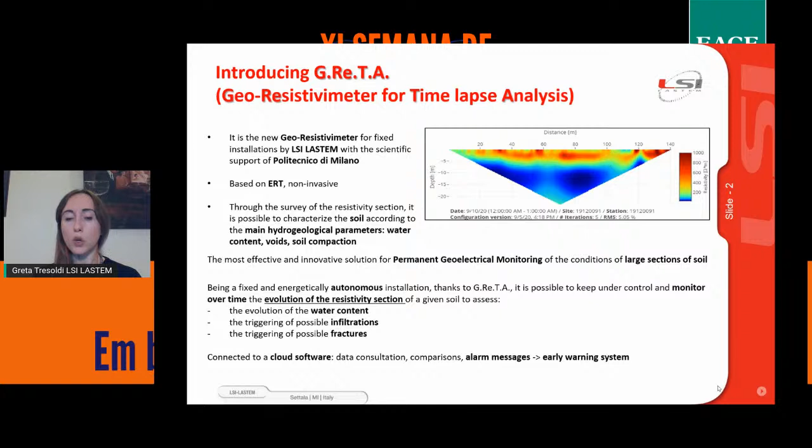As I said, the system is always connected to a cloud software, and it is possible to consult the data, but also to program the system and set thresholds in order to transform this system into an early warning system. Here is a short video to understand the technology better, and then we can go through technical specifications and also case studies.

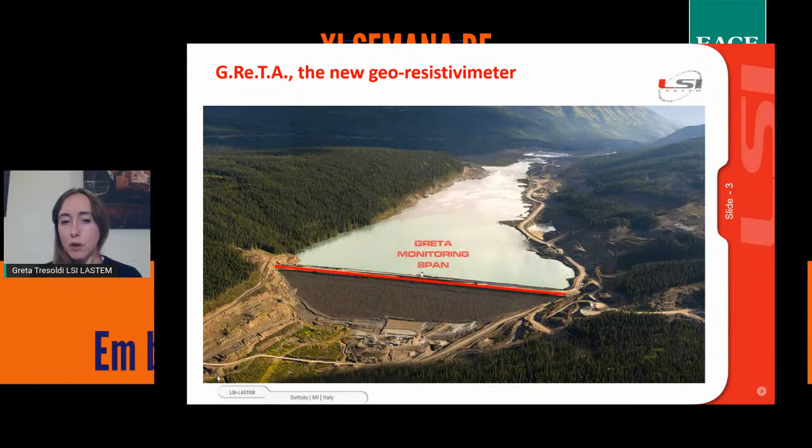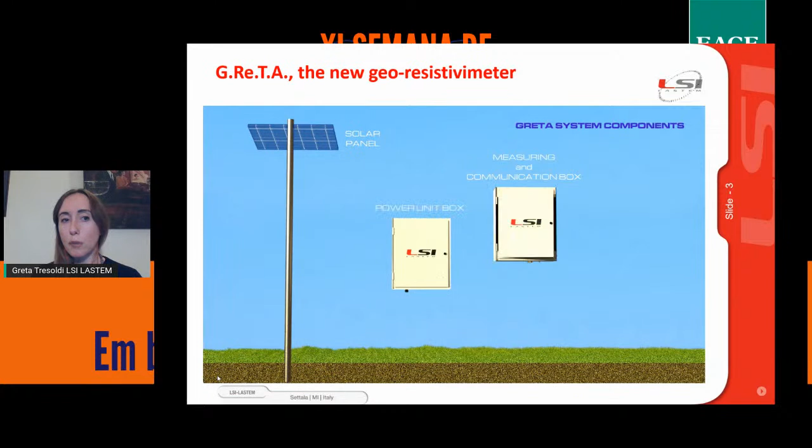So this is the acronym of the system. Here is an example of how the system can be used, for example, for an earthen dam, put on the crest in order to monitor the subsoil. Here the system has a box where the different modules for the measurements are contained, and the system can be connected to a solar panel or the main grid. There are different parts: power unit, communication unit, measure unit. The system is accompanied by two cables with a total of 48 electrodes in order to perform the geoelectrical measurements.

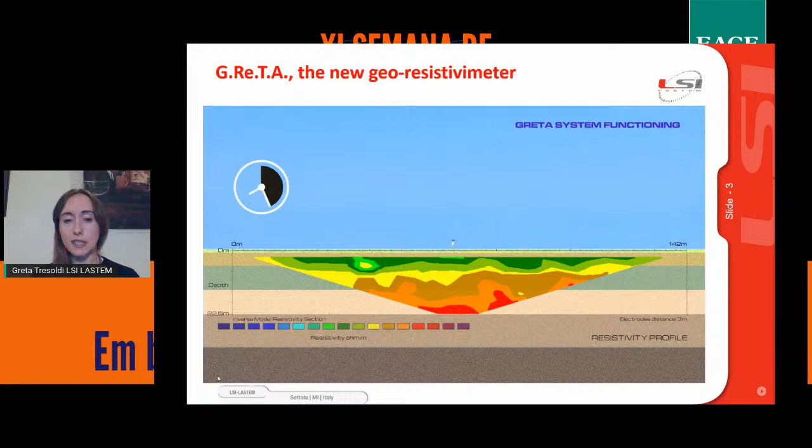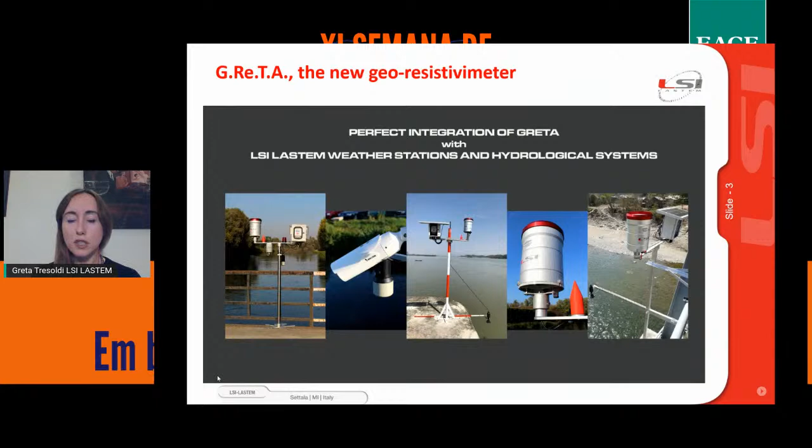So to insert the current and measure the voltage, the inversion is done directly on the cloud software. If something is changing, the cloud can send an alarm message. The system can also be easily integrated with different kinds of sensors, such as meteorological or hydrological sensors.

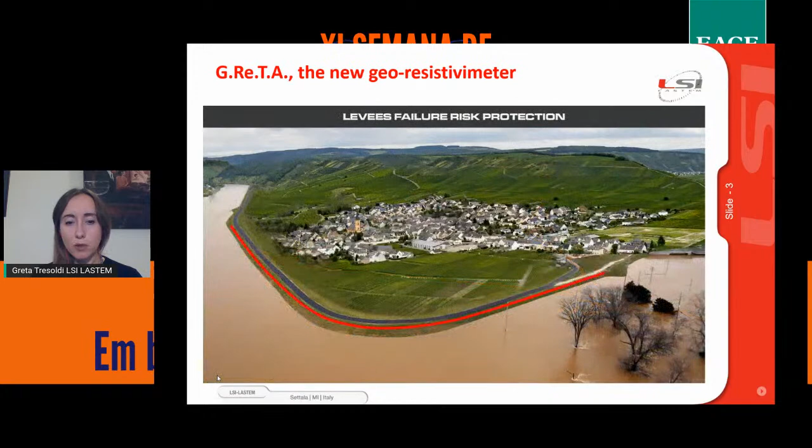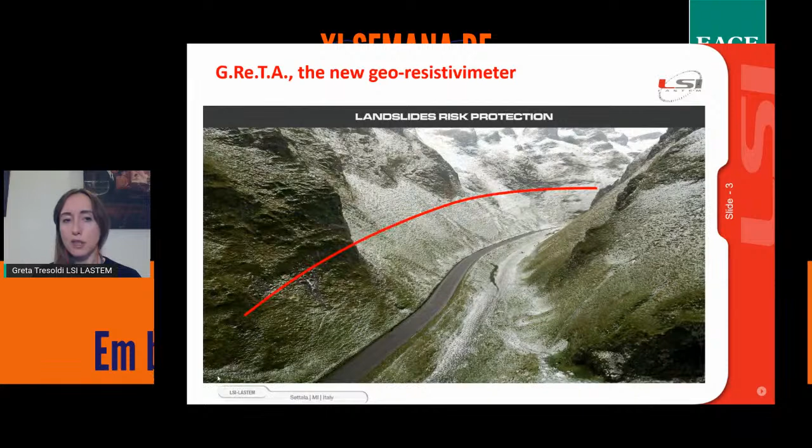This system has a lot of applications, for example earthen dams failure risk protection, the monitoring of levees, or the monitoring of earthen embankments, such as railway embankments, and also landslide monitoring. Also, pollution and landfill monitoring can be a really important field, or precision farming.

There we can go more in depth into the different kinds of applications. So the project of the Greta system started more or less 6 years ago with the Politecnico di Milano, in a financed project applied to levee monitoring in order to lower the hydrogeological risk connected to earthen levee structures. ERT measurements can be really useful in order to analyze in a non-invasive way the processes that are inside the structure.

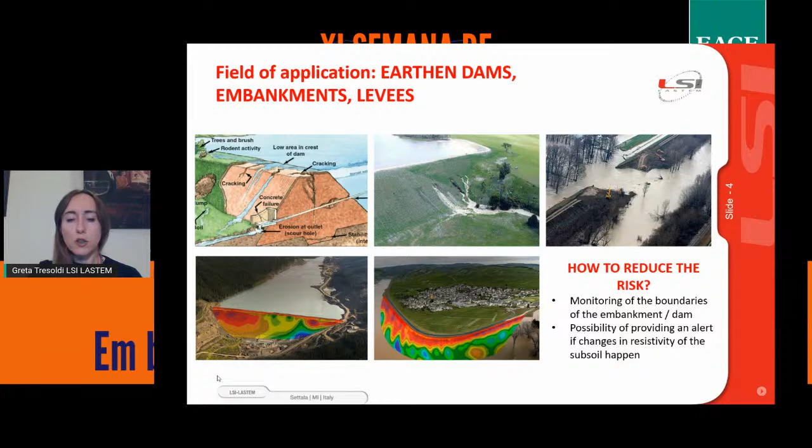So it is possible to analyze the subsoil of dams or levees from the boundaries, and it is also possible with resistivity analysis to provide an alert if changes in resistivity happen. This was really useful for managing authorities of, for example, canals or rivers, in order to plan intervention before a collapse.

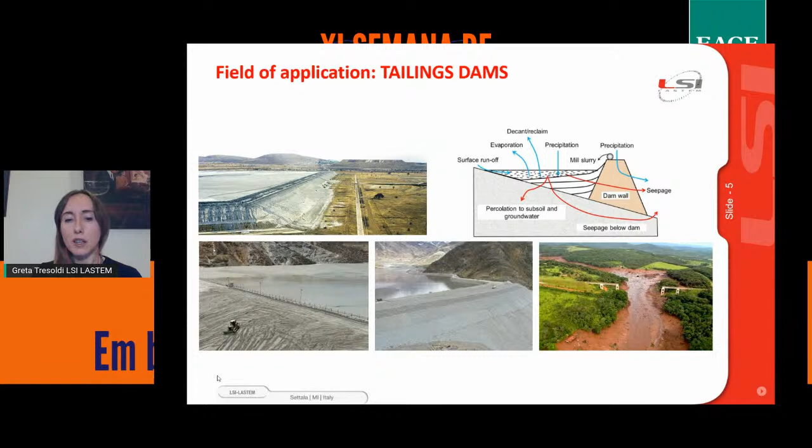Another field where the system has been tested is tailing dams monitoring. As you obviously know, these kinds of structures are really vulnerable to, for example, different seepages inside the structure. So it is really important to monitor these kinds of structures and also to analyze the processes - I will speak about it later on. We tested the system in one of the largest mines in Chile in 2020.

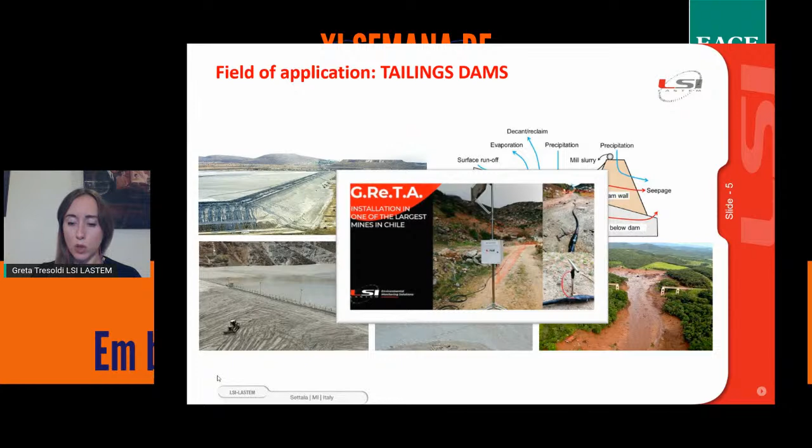Another field of application that is really promising is soil contamination and landfill monitoring. As you know, pollutants have different resistivities from the host soil. For example, leachate has a very low resistivity, while hydrocarbons have a very high resistivity. So the migration of this kind of contaminant can be followed and also prevented using this kind of system.

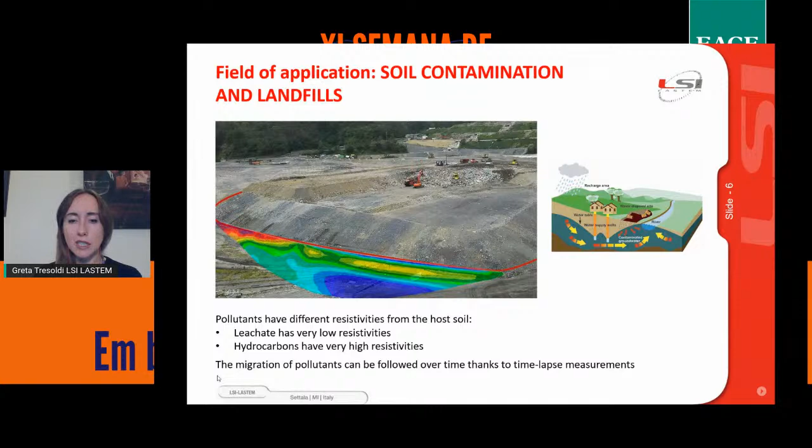A really important field of application is also the monitoring of the geomembrane of landfills, in order to understand if there is a fracture inside this protective layer.

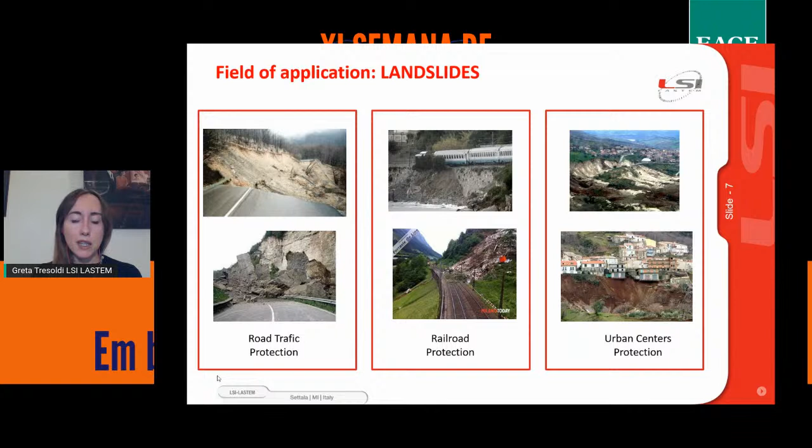Another really important field of application is landslides. Landslides are a really complex phenomenon, but most of them are triggered by water infiltration. So having an idea of the path of the seepage or the accumulation of water in some parts of the landslide can be really useful to understand the processes, and also to combine different measurements - piezometric, inclinometric, and resistivity measurements - in order to have an extensive series of data to be compared and used for models.

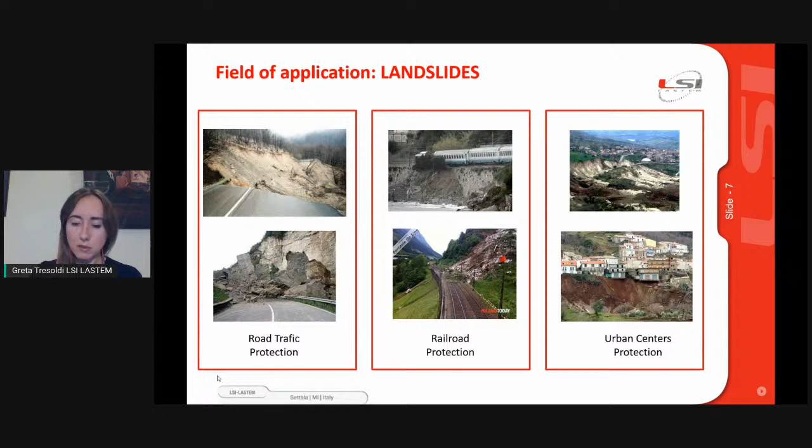I don't want to speak a lot about electrical resistivity tomography, for sure you know a lot about it. So, the insertion of an electric field through input electrodes and the measurement of voltage in other electrodes, in order to calculate the resistivity value, the apparent resistivity value. Obviously, there is then the need to perform a tomographic inversion of the data. In our case, the Greta system hosts the tomographic inversion procedure on the cloud software, and it is automatic.

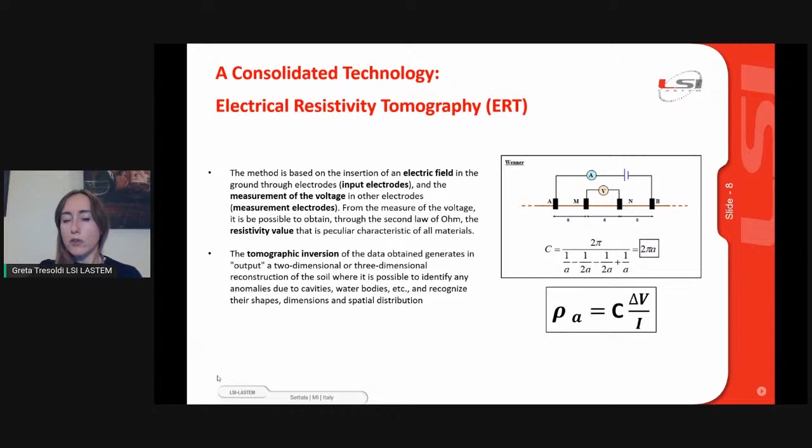And we use for the system the Wenner configuration. We decided to use this kind of configuration because it has a really good response in terms of topographic effects. So we use the Greta system along, for example, levees or dams where the 3D effects are really high. We want to minimize this kind of effect, and the Wenner configuration is a really good configuration to minimize this kind of effect.

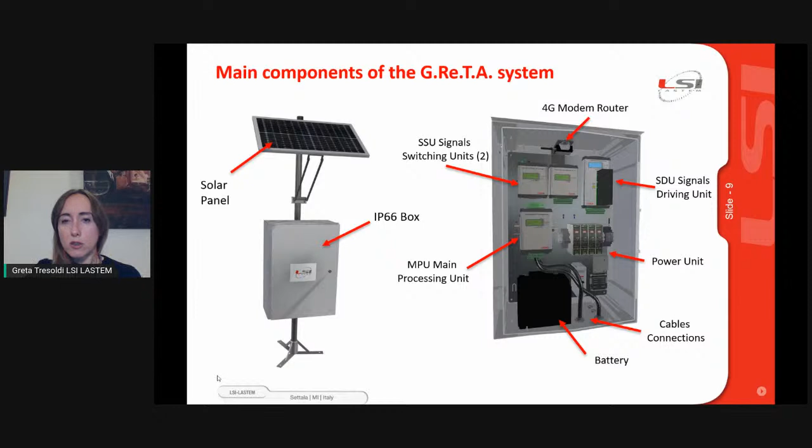The battery can be charged by the solar panel, and there is also communication built in because this is a system meant for monitoring. So it is autonomous and can work remotely without human intervention on site. This is really useful where the system is located in a remote place, for example a dam or tailing dam where people don't go every single day. So there is a modem router to communicate with the cloud software.

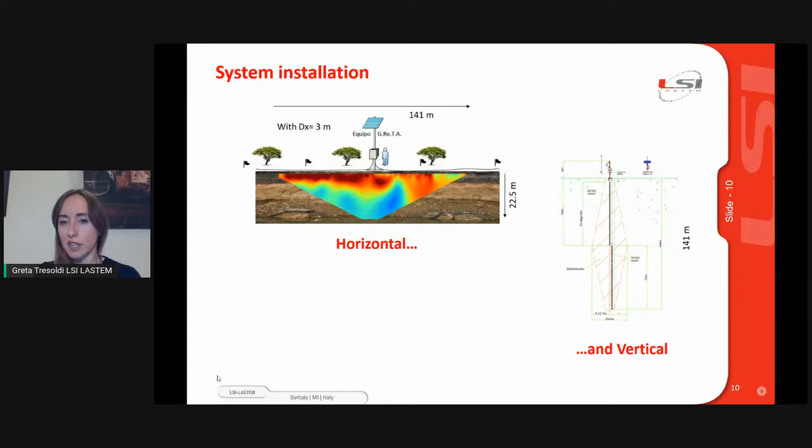The installation of the system can be done in two different ways: the cables can be installed horizontally or vertically. Speaking about the horizontal installation, two kinds of electrodes can be used. What we tested are the plate electrodes.

We use plate electrodes a lot because they provide good coupling between the electrodes and the ground, so the quality of measurements is really good. This kind of electrode can be used for a long monitoring period, since you need to dig a trench that isn't very deep, only about 40 centimeters. It's a simple excavation, and then the cables and electrodes are covered, so the only thing visible from the outside is the pole with the box and the solar panel.

In this way, the electrodes are also protected, since they are not on the ground, so people, animals, or means of transport cannot damage them. If, for example, a monitoring campaign of 2 weeks or 1 month must be performed, so not a permanent kind of measurement, it is better to use rod electrodes.

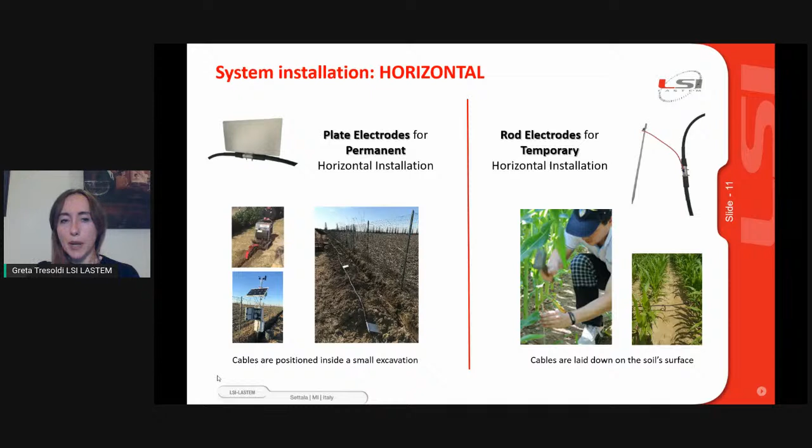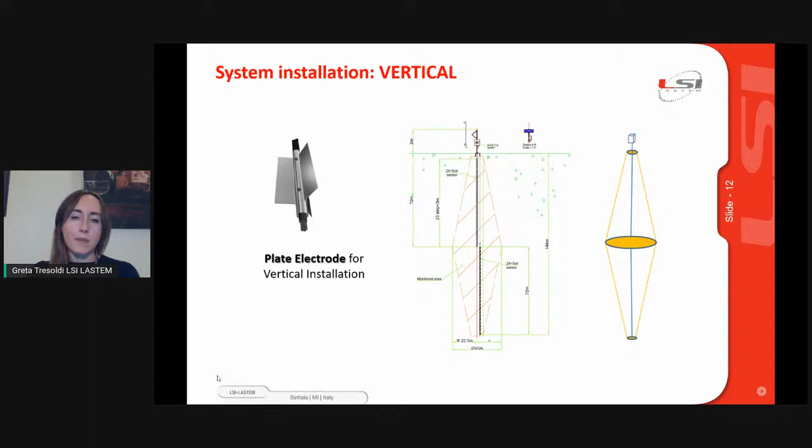Another kind of installation is the vertical one, to be performed in a core. In this case, we design electrodes with 3 different small electrode points. The cables are different because the first cable has electrodes starting from the first point, while the second cable has a first part without electrodes and a second part with electrodes. In this case, the result is the mean value of the resistivity along depth.

Just a quick view of the cloud software. It allows visualizing the data obtained from the system in real time, but also setting the system and deciding, for example, the frequency of the measurements, and setting thresholds for alarms or other kinds of settings.

This is the home page. The user can visualize the position of his systems, and there is also a first diagnostic tool, since there is a traffic light indicating if the measurements are performing well, or if there is a problem in the connection.

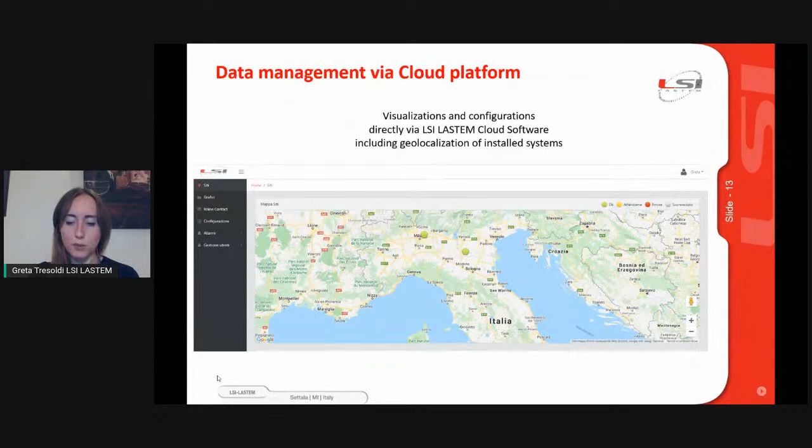Then the user can access his own system and visualize the measurements. In this case, we see the inverted resistivity, but it is also possible to control the raw data and all the parameters, so the injected current, the measured voltage, and the quality factor of the measurements. It is also possible to extract the data from the platform and perform other calculations outside the software.

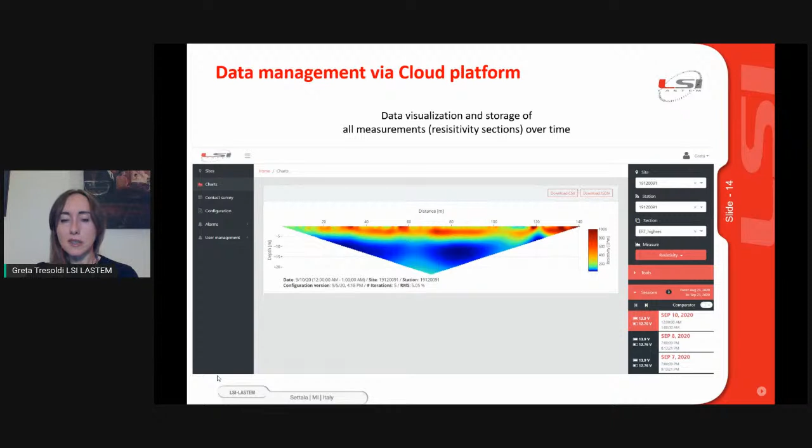On the right side, there is a calendar, and the user can compare and control all the measurements done by the system. So it is a really useful tool in order to perform monitoring and control the processes over time.

We are also performing some changes to the platform, and we are introducing the possibility of visualizing data coming from other sensors, because we think that combining measurements is the strong point of monitoring.

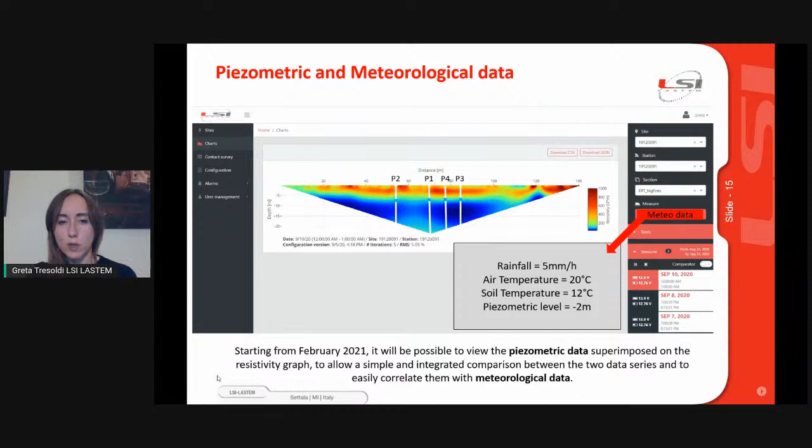So starting from February, we will implement the possibility of superimposing piezometric data on the resistivity section, and also controlling meteorological data, since the Greta system can be equipped with another data logger and connected to, for example, rain gauges or other meteorological sensors. It will be possible to control the meteorological data that can influence the measurements directly from this platform.

As I said, the user can also compare different data from different days and manually compare them to control the variation over time.

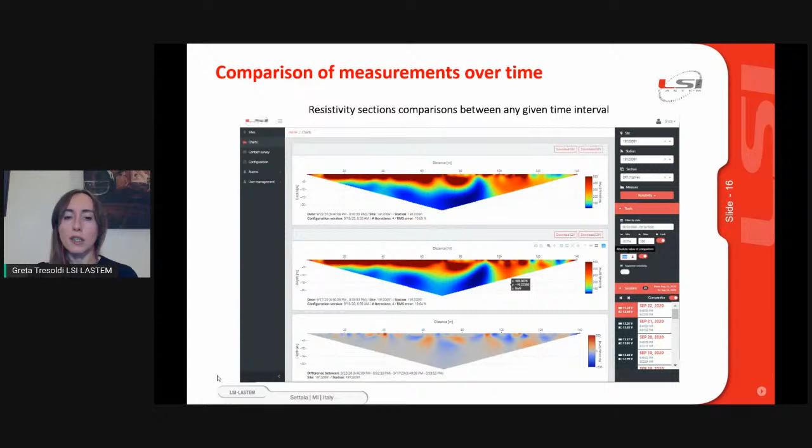In this platform, it is also possible to set thresholds, so the system can perform automatic comparisons in order to alert the user by email if something is changing.

Another important part of the software is the possibility of converting the resistivity images into water content maps. To do so, it is important to calibrate the system.

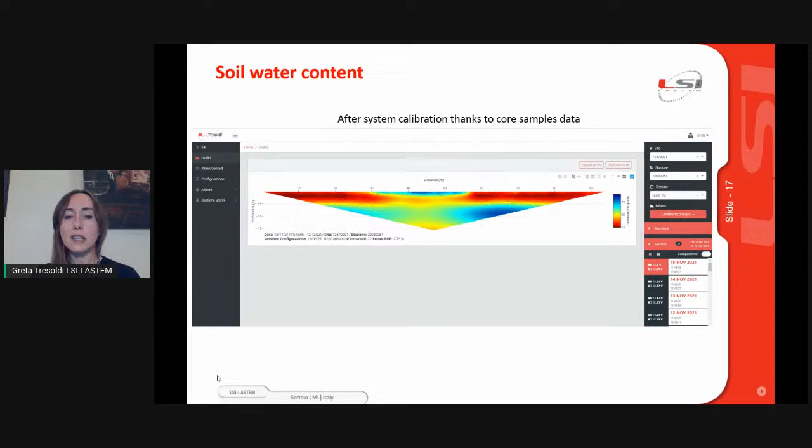As I will show later, a core is needed at the site. Taking core samples in the lab and measuring directly the water content of the samples along depth, it is possible to correlate the resistivity values from the Greta system to the water content of the different samples and obtain a curve, an inverse relation between resistivity and water content. Inserting the parameters of this curve, A and B, into the cloud software, it is possible to obtain directly an estimation of the water content.

What we usually do is also perform some laboratory analysis on the samples, for example granulometric analysis, in order to analyze the subsoil of the site.

Here I will show you some last improvements of the system we performed while we approach the tailings dams monitoring field, since tailings dams are really harsh environments and usually have arid soils. We made some improvements in the systems in order to always have good quality data.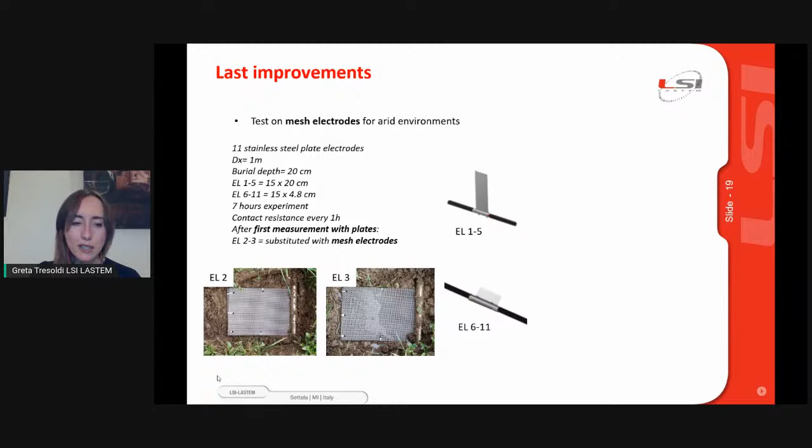We performed a 7-hour experiment measuring contact resistance every hour. But after the first measurement with the plate electrodes, we changed electrodes 2 and 3 to use mesh electrodes, since we wanted to test this new kind of electrode.

We performed this test on one kind of soil. We want to perform more tests on different kinds of soils, but for this kind of soil, we don't consider this kind of electrode an improvement in the contact resistance test. So we decided to continue using plate electrodes also for the mining environment.

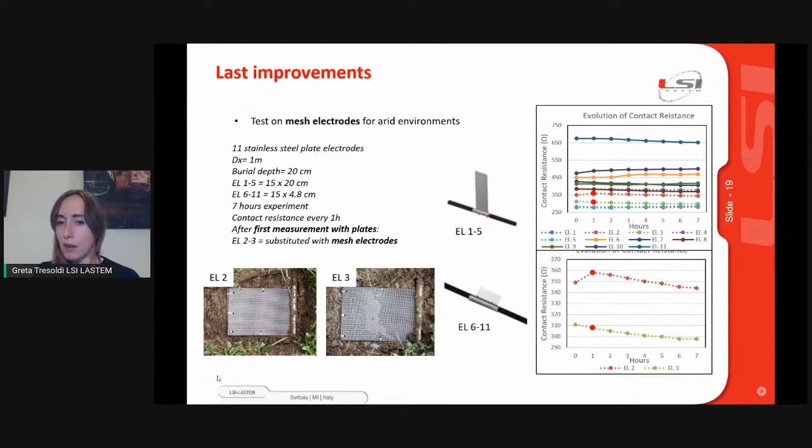Another point is the low-level measurements. We implemented the plus-minus-minus-plus method for injection.

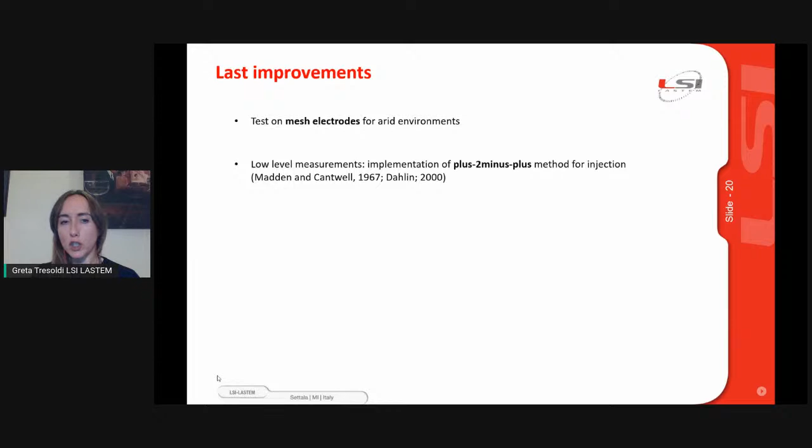We wanted, as an objective, to suppress the low frequency variation in background spontaneous potentials, so we included this new injection method in the system. The current injection consists of a positive injection, a double negative, and finally another positive pulse.

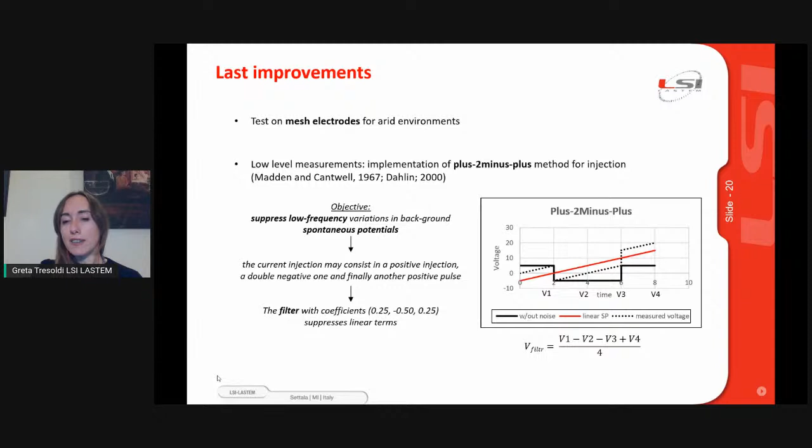Then we implemented also the Focus-one protocol for contact resistance, since we wanted to measure the true single electrode contact resistance and not the coupled contact resistance between electrodes.

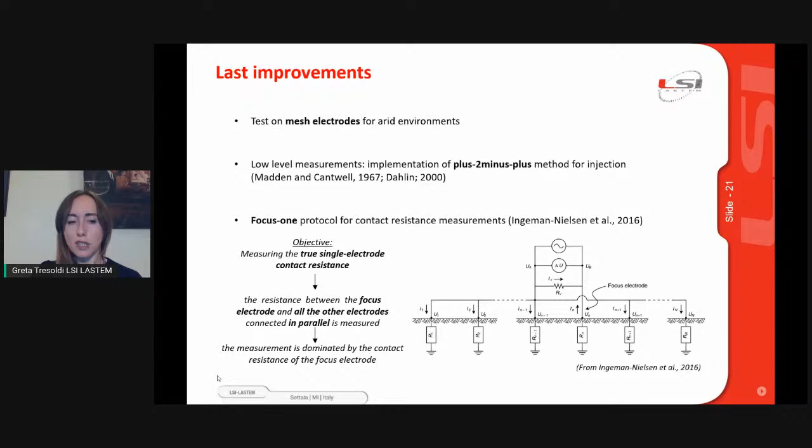This kind of measurement is done by measuring the resistance between the focus electrode and all the other electrodes connected in parallel. In this way, it is possible to measure the contact resistance of the focus electrode, the one that dominates the other resistances.

Then we changed the measurement sequence in order to avoid polarization of electrodes. Since if a couple of electrodes used previously to inject the current is then used to measure the voltage, it is possible to have polarization of the electrodes, and the measurement can be damaged.

So we changed the scheme of injection in order not to use the same electrodes for injection and then for measurements.

Another important point that we introduced directly in the system is the automatic electrode depth compensation. We changed the geometrical factor of the measurement, the calculation of the apparent resistivity, and modified it in order to account for the burial depth of the electrodes.

Since we use to bury the electrodes in order not to damage them, we wanted to include this effect directly in the measurements, using directly a modified geometrical factor.

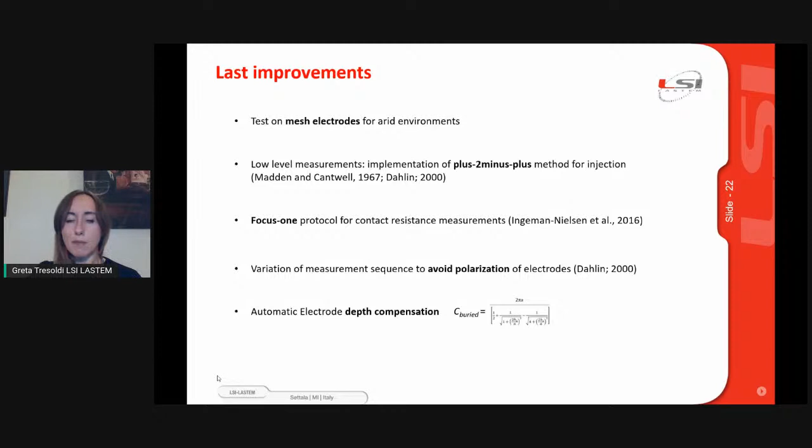About this point, I will show you a preview of some slides from the next Near Surface Geoscience and Engineering conference that will take place this month. I will show you some slides from my colleagues that we produced for this conference.

These slides are made by Azadeh Hojat, a professor at Politecnico di Milano, and also Shahid Bahonar University of Kerman. The title of our presentation is 'Correcting the Effects of Soil Covering Buried Electrodes for Permanent Electrical Resistivity Tomography Monitoring Systems.' So in order to create this new geometrical factor for the calculation of resistivity, we studied the optical hypothesis of the image source analogy.

We studied the effect of the layer above the electrodes, starting from the very beginning, with 2 points: one where there is the injection of the current, named I, and one where there is the measurement of the voltage, named P.

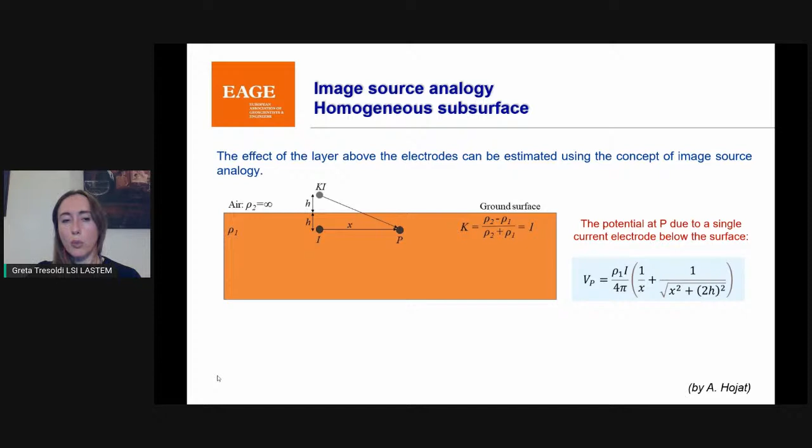So we studied the reflection of the image source, and then we obtained the voltage that is measured with this configuration, with a homogeneous subsoil where these 2 points are set.

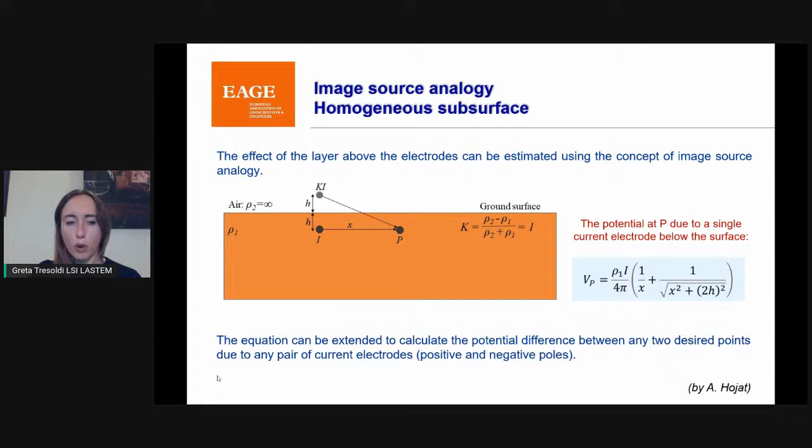This equation, with only one point of injection and one point of measurement, can be extended to calculate the potential differences between any two desired points. So we extended this calculation to the Wenner configuration with unit electrode spacing named A. We can see here a formula that is the ratio between the calculated resistivity

If the electrodes are buried inside a trench that is half a meter deep, we can have a decrease in the calculated resistivity of 25% for the spacing of 1 meter. Then we can see that if the spacing between electrodes is bigger, this effect is lower.

We can see that this effect is related only to the first level of measurements, so where the spacing between electrodes is comparable with the burial depth of the electrodes. But it can introduce a sort of mistake in interpreting the first level of measurements.

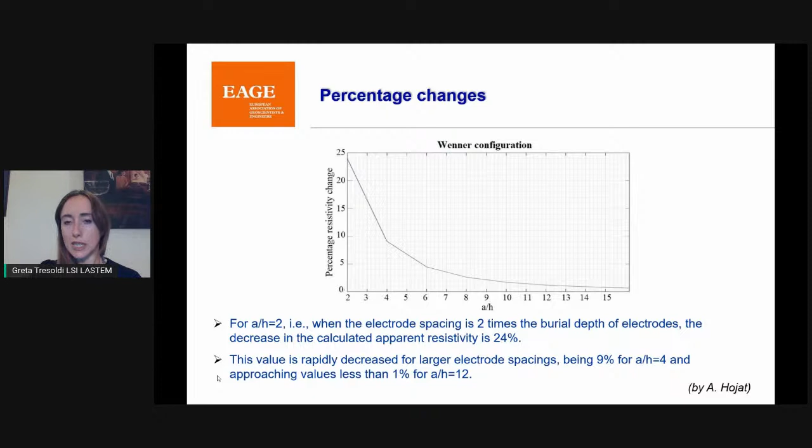So going in depth, with wider electrode spacings, this error is not so significant. But by changing the geometrical factor in the calculation of resistivity on the apparent resistivity, we can eliminate this error and perform the inversion automatically without introducing such an error.

Here I will speak to you about some case studies of the G.Re.T.A. system in different fields of application. The first case study is the installation of the system on the tailings dam in Chile.

The monitoring aim was to monitor the phreatic level, through this kind of measurement, below two wastewater ponds. These wastewater ponds were built below the dam, and the problem was to understand if the variation of the level in the ponds would influence the phreatic level.

So the study was done by installing, for a short-term campaign of only 2 weeks each, two G.Re.T.A. system profiles, and comparing the resistivity data with the piezometric data present on the site.

Here you can see some photos of the first profile. The system was put in the center of the profile. The cables had a spacing between electrodes of 3 meters, and surface electrodes, the rod electrodes, were used because the monitoring campaign lasted only 2 weeks.

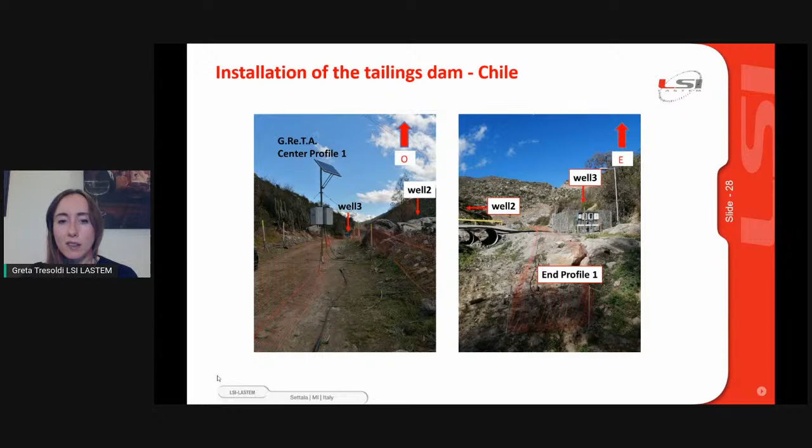We can also see the position of the wells on the site, and here we can see profile 2. As you can see, the soil was really harsh, really arid, so we studied a lot the contact resistance, as you can see later on.

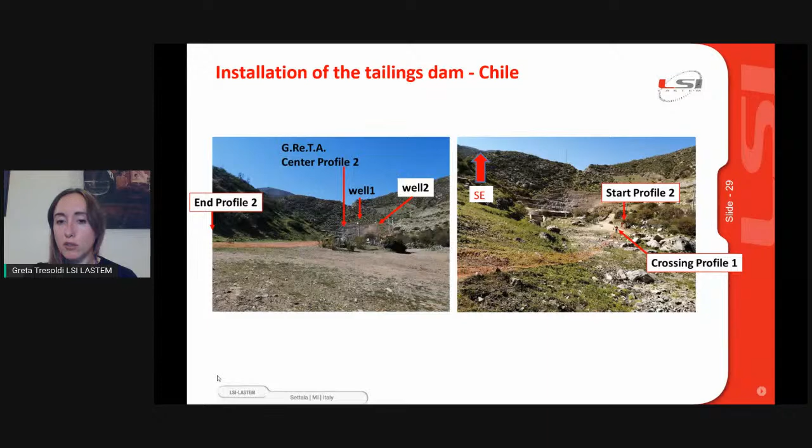The problem was the contact resistance between these electrodes and the soil of the mine. You can see that we tested the contact resistance over all the measuring period. In the graph, you can see the number of electrodes on the x-axis and the contact resistance for 3 different measurements, where the first measurement is the black line.

You can see that there is a last part of the profile that was quite bad in terms of contact resistance. After 1 day, we tried to lower the contact resistance with salt water and also by hammering the electrodes.

Then there were some rainfalls, and the resistivity went really well along all the monitoring period, and the end part of the profile became more or less like the other part.

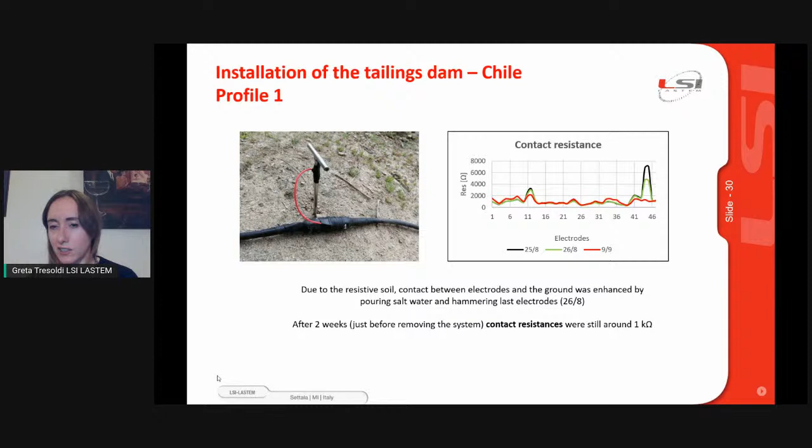What we can see is that the standard deviations of the measurements were really good. We can see a pseudo-section of the standard deviation during the first day of measurements, the 26th of August. More or less all points were under 0.5%, except for a line of measurement corresponding to the end part of the profile, the worst one, while in the last day of measurements, the 8th of September, the situation was really good.

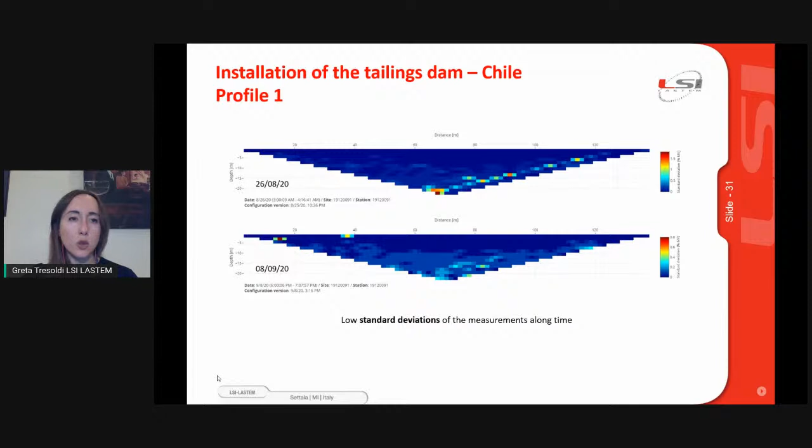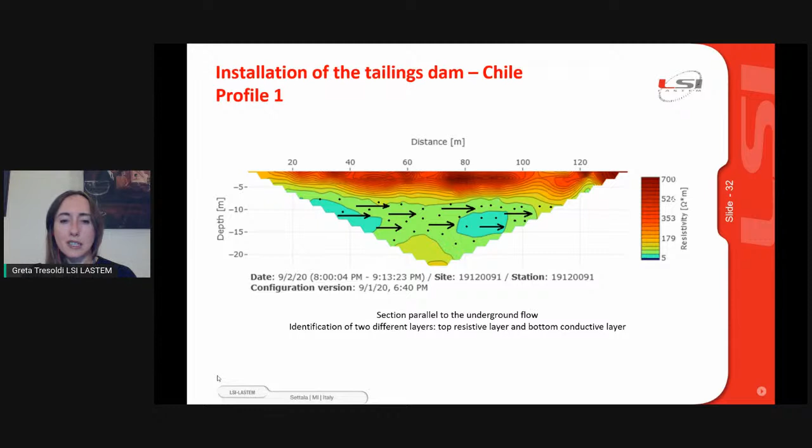So we obtained high quality data for the whole period. This is a focus only on profile 1, but we also had profile 2 for another 2 weeks. What we obtained was an image of the processes at the site, so thanks to the piezometric data we could also understand the position of the groundwater flow, and you can see a great difference between the first part of the section, the shallow one with high resistivities, and the second part, the deep one, with resistivities around 80 ohm-meters.

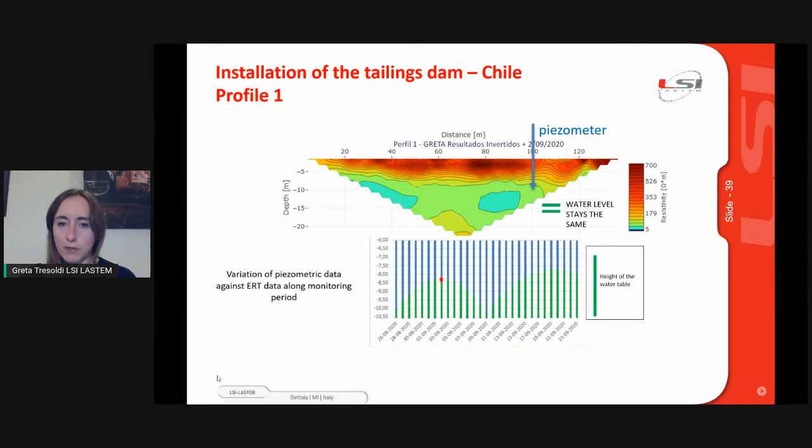The aim of this study was also to follow the variation of the water level in the pond compared with the variation of resistivity. I cannot show you all the data, but only a part. We can see the position of the piezometer in the zone and the variation of the resistivity with the boundary between the 2 zones going up while the water level is rising, and then also the water level that stays the same, and the resistivity stays the same from the day before.

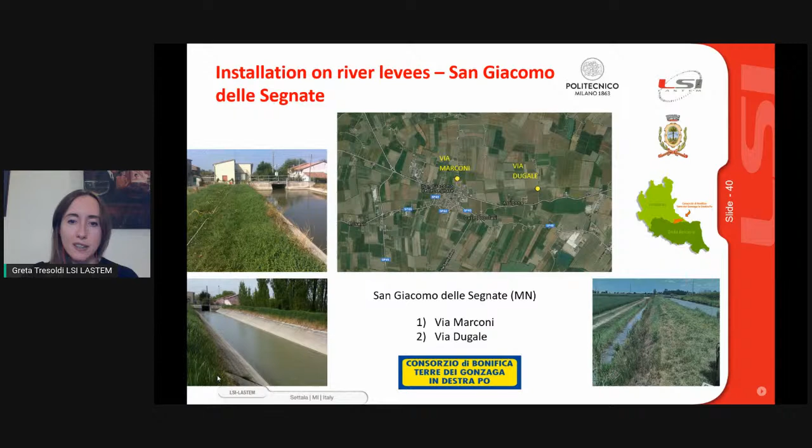Another case study, in reality the first one, is the San Giacomo delle Segnate site, in the northern part of Italy, where we tested the ERT technology in order to obtain valuable data to understand different kinds of seepages in an earthen embankment of an irrigation canal. I can show you different measurements performed along one year in this earthen embankment, from September 2014 to September 2015. This was the first test to understand the feasibility of the system on this kind of application.

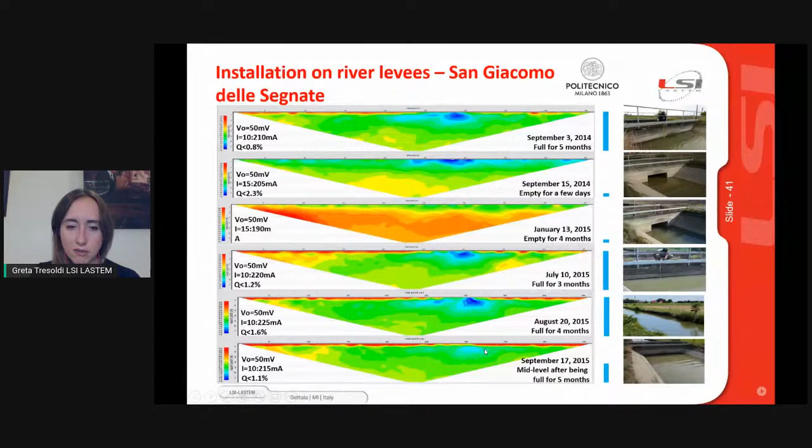During the winter, the soil is dry, there is no water, there is no seepage, so the resistivities are higher, while after almost one year, with the presence of water in the canal, the concentrated seepage returns. The situation became worse during the month of August, and then the situation is really strange because it seems that the seepage is not present.

The fact was that in the exact position of the identification of this concentrated seepage, there was a failure, a partial failure of the levee, and that gives us proof that the system is really effective in understanding the exact position of concentrated seepage, also in this case one year before.

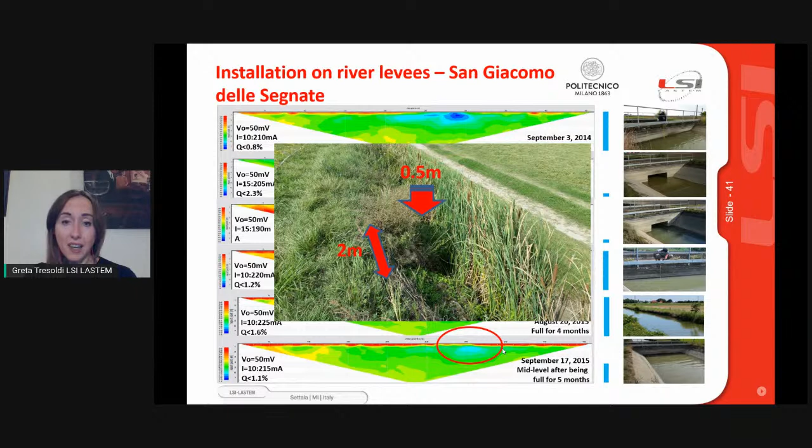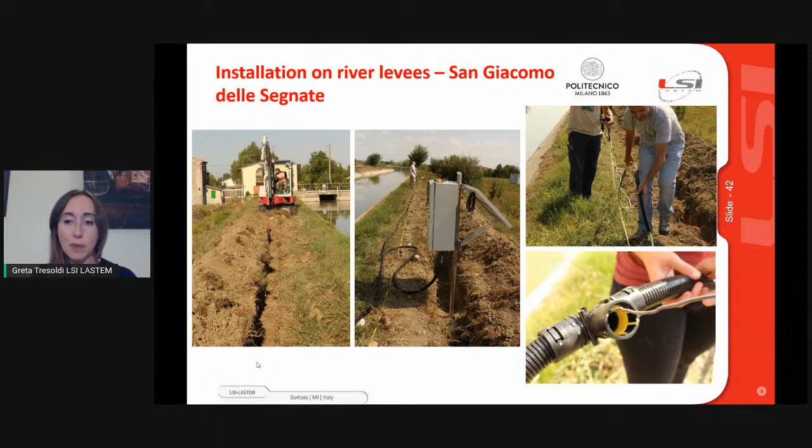This was the first installation of the Greta system on this embankment. Here you can see the trench, the position of the box inside the trench, and the cables that, in this case, were protected with an anti-rodent plastic case in order not to be damaged by the rodents present in the site.

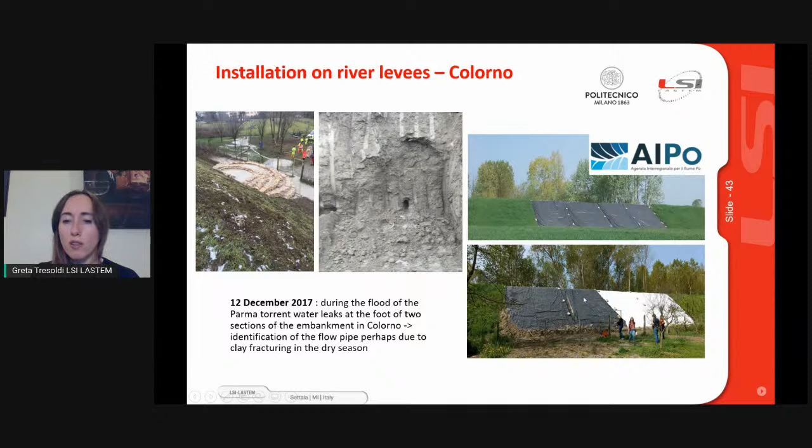Another case study is related to a bad event that occurred in December 2017. There was a flood in the northern part of Italy, and two different embankments of the river Parma, Torrente Parma, fell down partially due to concentrated seepage. These levees were rebuilt, but with different kinds of materials. So we performed some portable measurements to understand the situation along a long part of the levee, and we identified really well the newly built part, which was built with soil with a high percentage of clay.

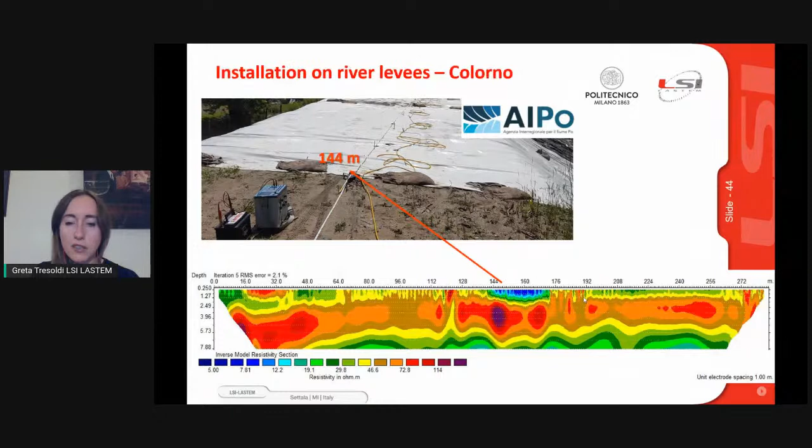So there was a quite difficult situation since the old part of the levee has different material compared to the new part. It would be quite a hazard, for example, with another flood. It can be really risky. So the managing authority for this part of the levees decided to put a Greta system inside.

In this case, with an electrode distance of 2 meters, a total profile length of more or less 100 meters, and an investigation depth of more or less 15 meters. These systems are still working, and they provide daily measurements. Obviously, the frequency of the measurements can be changed, for example if there is a flood or some risky event.

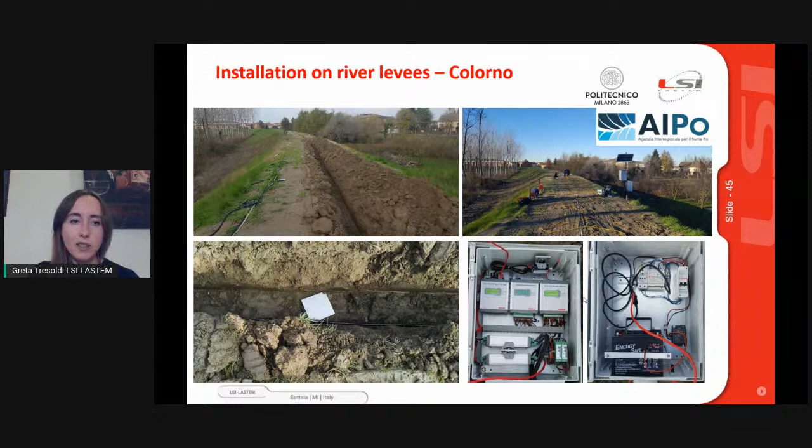Other conclusions: the last improvements to the Greta system resulted in high quality data. We discarded mesh electrodes, but we want to perform more tests. We introduced the plus-two-minus-plus algorithm for more stable data, and also the Focus-one protocol to measure the exact contact resistance of each electrode. The sequence was modified in order to avoid polarization of electrodes, and we implemented the automatic depth compensation for the calculation of apparent resistivity.

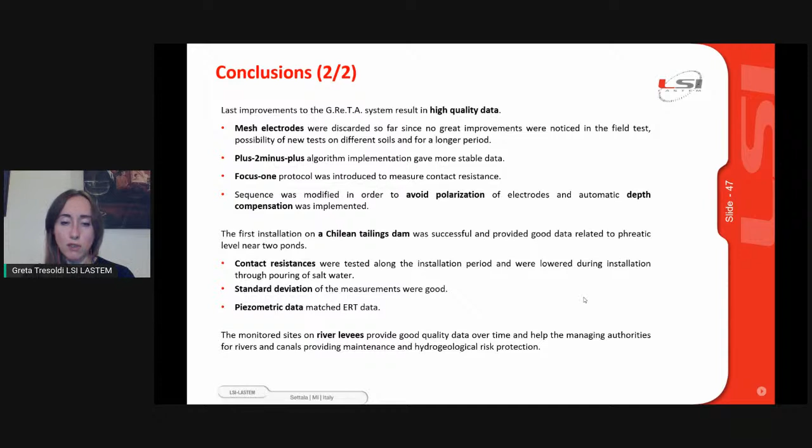The first installation on the Chilean tailing dam was really successful, with good contact resistance over a long time and also good quality data. It was possible also to match piezometric and ERT data. The monitoring sites that we still have on river levees provide good quality data, and they really help the managing authorities for rivers and canals, providing information about possible maintenance or hydrogeological risk protection. So thank you for the attention. If there are some questions.

Greta, thank you very much for your presentation. It's an honor for us to have such a talented researcher presenting for us today. I myself see many applications for this in Brazil. You may have heard of some tailing dam problems that occurred here in recent years, like Brumadinho and Mariana. And actually, in my city, we have a lot of landslides every time it rains strongly. So I see many applications of your contribution to the world. We have some questions here, and I myself have some.

So I'll start with Matusada Mais. Oh, he has written in English too. So, good afternoon, Greta. Is the system itself capable of checking electrode malfunction over time?

Yes, absolutely. On the platform it is possible to set the frequency of contact resistance tests, and the system itself stores the data of the contact resistance over time. For example, we used to perform weekly contact resistance tests, also because these systems work remotely, so we cannot go there and control the electrodes that are buried every time. So it is even more difficult to have control on the electrodes. For this reason, we introduced the possibility of performing contact resistance tests remotely.